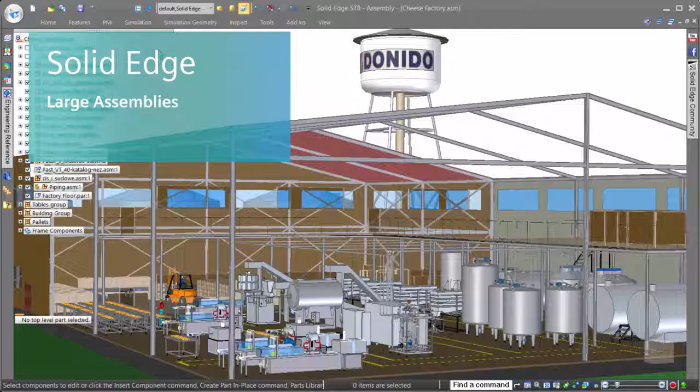In this example, we'll look at how Solid Edge handles large assemblies. One of the biggest issues when working on large assemblies is how much time it takes to open and load all of the parts. Solid Edge accommodates for this by giving the user full control of exactly how a large assembly is opened using a variety of different tools.

Tools such as Assembly Open As is one way in which users control how they optimize time to open, providing options to define the size of an assembly as well as the state of the parts when loaded. These options are fully customizable and lead to improved performance when working on assemblies of all sizes.

Additionally, Solid Edge offers another great usability tool in a top-level assembly filter that filters out all lower-level assemblies and parts, greatly reducing the amount of time necessary to find the top level, especially when being viewed alongside other parts and subassemblies. The assembly we're working in today is from a Solid Edge customer, Donido.

This cheese factory is one of their large factory layouts containing just under 13,000 parts with over 1,700 subassemblies, altogether over 700 megabytes of data. The computer we're working with today is a Microsoft Surface Pro 3 tablet device, not a CAD-specific workstation.

We've optimized Solid Edge for opening large assemblies, and notice how quickly we're able to get into our assembly and immediately begin work. No matter what system specifications or the size of the assembly that you're working with, Solid Edge provides the tools to utilize computer resources in the most efficient way.

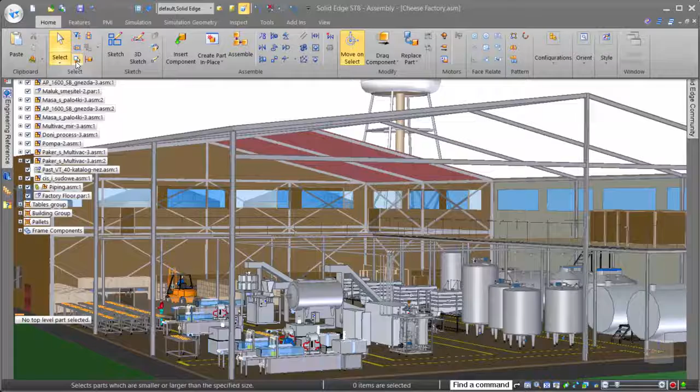Of course, once the assembly is open, another very important aspect is working performance once it's on the screen. Solid Edge offers a great selection tool that allows us to select any parts based on their size in comparison to the rest of the assembly.

The Select Parts by Size command is a great way to select small parts, such as nuts and bolts, and hide them all in one action. Once we've hidden the parts that we don't want showing, unloading them from the assembly is a simple process that frees up more system resources for the tasks at hand.

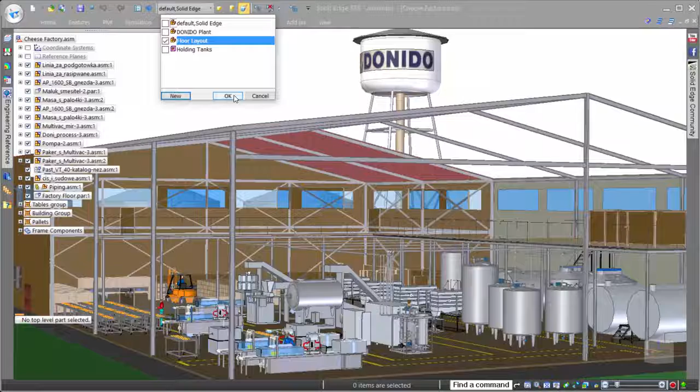Of course, in large assemblies, it's important to be able to work on the data specific to the task, and to help us focus on the shop floor machines, we'll simply use a display configuration, or a preset grouping of parts, to show only those important to us.

Notice, many of the components on our machines seem very simple with little detail. That's because these machines have been simplified to cut out unnecessary details that leads to increased performance. Opening assemblies in their simplified state can reduce the opening time of large assemblies by as much as 75%.

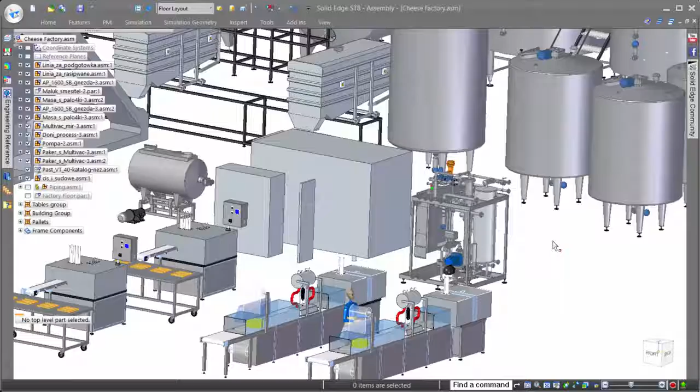Of course, as always, Solid Edge gives users full control over which assemblies they want shown simplified and which they want shown in detail. So let's take a look at how simplified assemblies are created.

Solid Edge provides users with a full set of modeling tools, so once you begin the simplification process, as many or few details as desired can be included in the resulting simplified assembly.

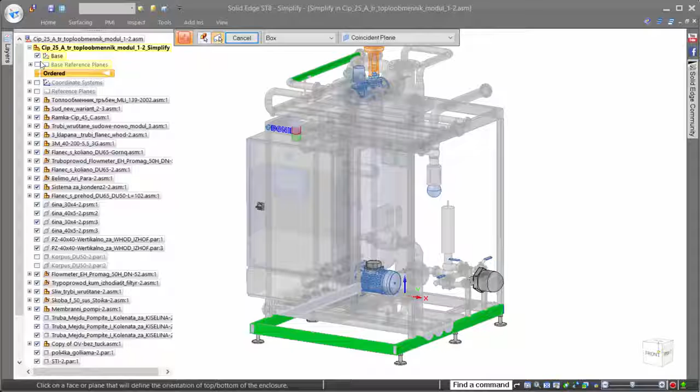One of the most efficient tools for creating a simplified assembly is the enclosure command, allowing users to simply click on the parts that make up the boundaries and define a simple shape to represent it.

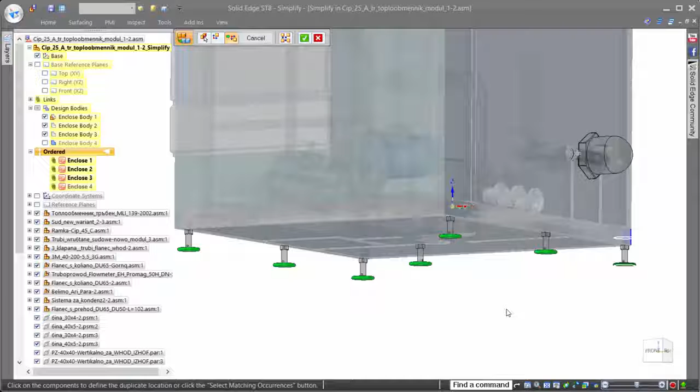If we need to preserve specific geometry of the assembly, we can easily do so. Here, we need to keep the feet for placement purposes, but rather than simplify each one individually, we'll use the duplicate component command to quickly place the simplified versions of the feet all in one action.

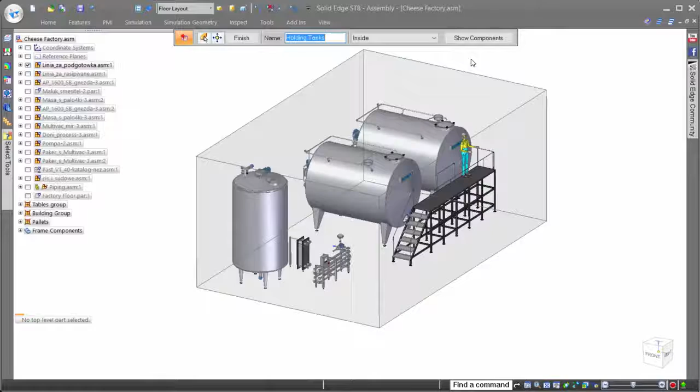In addition to the display configurations to turn on and off specific assemblies and parts, Solid Edge also provides zones, a tool that shows all components that lie within a defined area. Zones are also fully customizable, allowing for dynamic size changes to show whatever components you want within the desired working area.

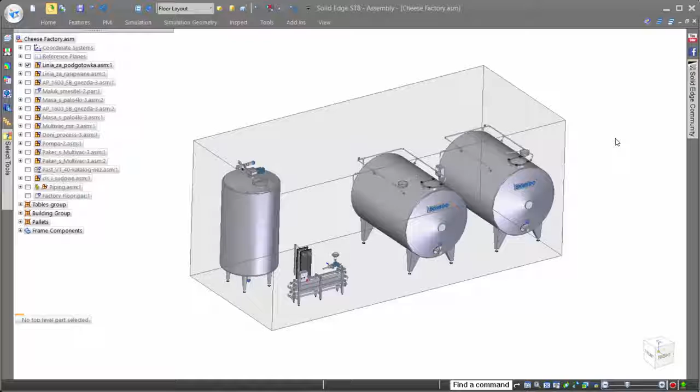In addition to working in zones once an assembly is open, the Solid Edge Open dialog allows users to select a specific zone when opening the assembly for the first time, making sure that only the components necessary for the work task are loaded. Of course, the less parts in a zone, the faster the open time.

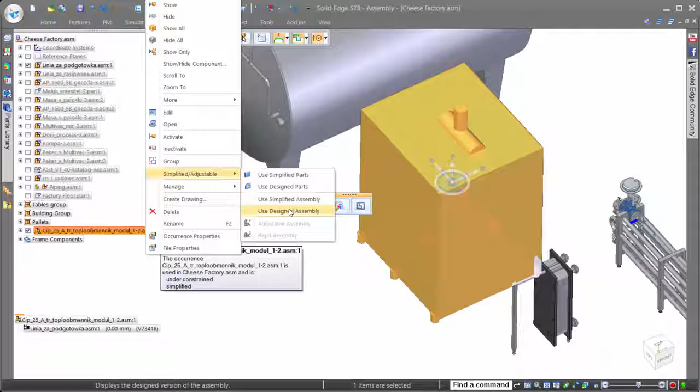Another great time saver when working in large assemblies is the intelligence that Solid Edge brings when placing new parts into an assembly. Notice when we bring in the new machine, Solid Edge automatically recognizes that there is a simplified version and uses the simplified geometry to optimize performance. Once fully placed, we can easily turn on the designed version of the assembly to see the full details.

Our next design task has us making some changes to the packaging equipment on the factory floor. Wouldn't it be great if there was a way to search and isolate all of the parts with specific properties associated to them?

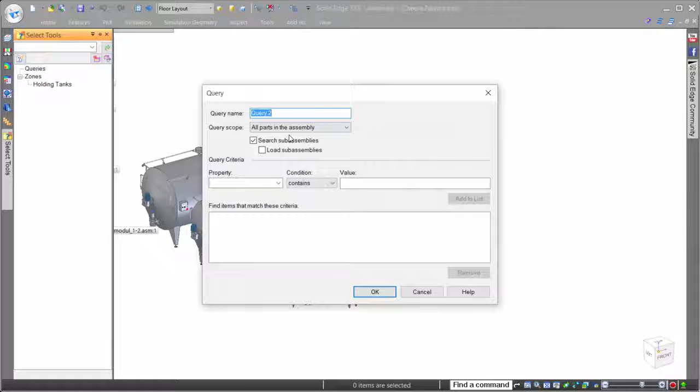Well, luckily for us, Solid Edge has a query tool that allows us to do advanced searches on any property within our assembly files. For this query, we'll simply search on packaging. Using our query quickly provides focus on the parts we need.

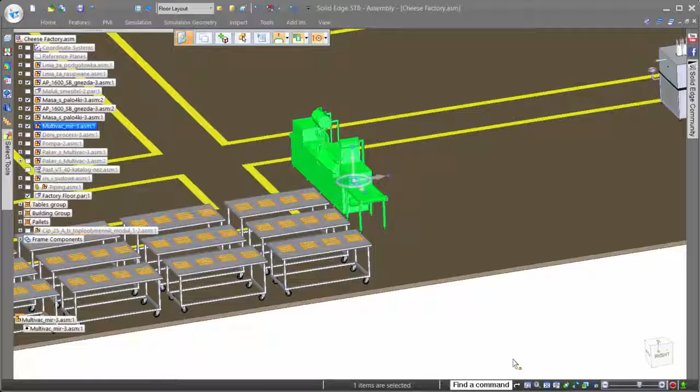For our design task, we need to increase the number of packaging machines to 4. Solid Edge offers unique capabilities in assemblies to create exact copies of existing data.

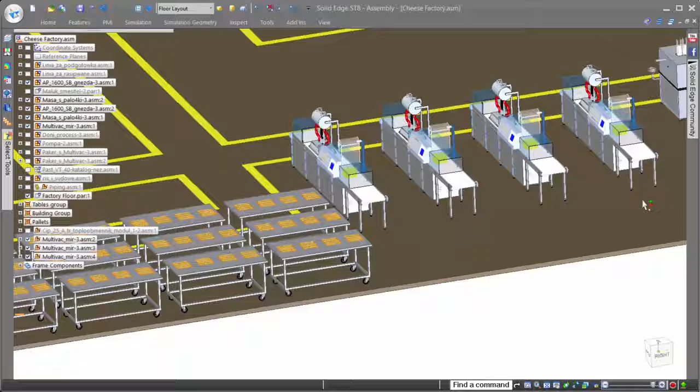Here, we can simply select the machine to copy, click copy, or hold the control key, similar to copy in Microsoft Office products, and then drag it to a new location. When making copies of components, the copies originate from the location of the steering wheel, allowing for precision on placement with keyed-in offset values, or even snapping to key points of other components.

Several additional tools also exist in Solid Edge that help to increase performance when working with colleagues in the same assembly. The first is called Limited Update.

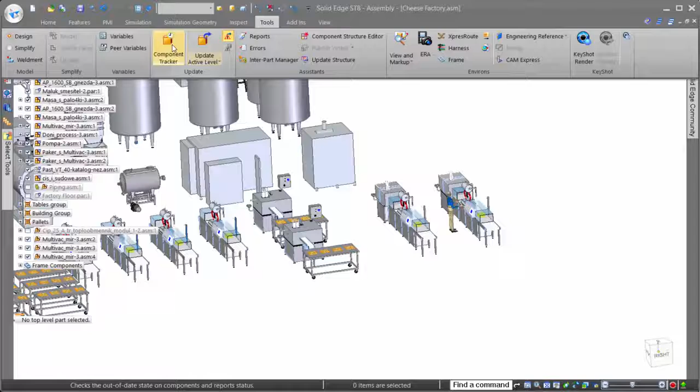Limited Update allows users to both limit which parts are loaded when opening, as well as updated when working in a specific area of an assembly. This allows system resources to be directed to the areas of the assembly pertinent to the design task.

Additionally, the Component Tracker tool is used to track the assembly and provide a full readout of the statuses of all of the parts, ensuring designers have the most current data when Limited Update is turned on.

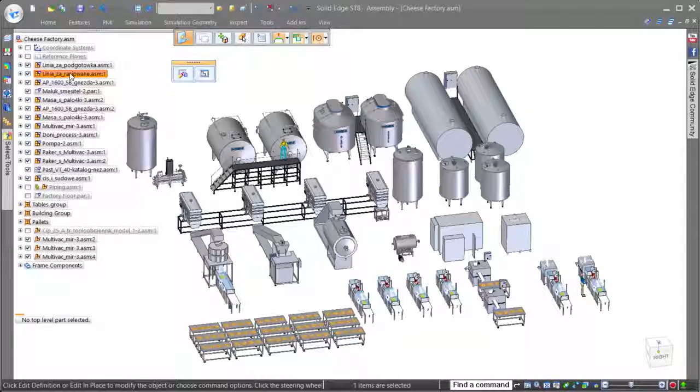And of course, once done in 3D, Solid Edge provides great tools to be able to create drawings of the assemblies, with options to bring in individual subassemblies only, or to create drawing views of parts contained only in the display configurations or zones we looked at earlier. No extra work is required to display exactly what is needed.

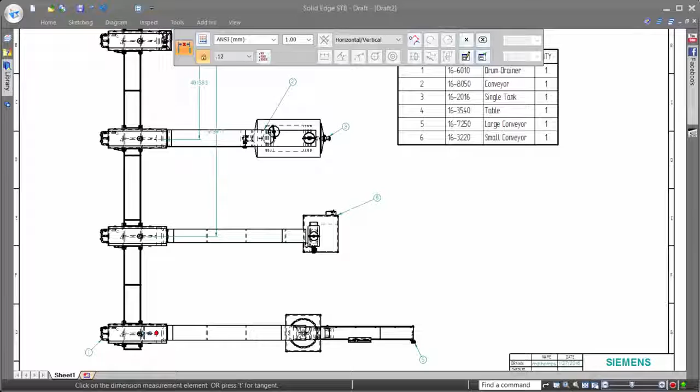Combine that with Solid Edge's ability to leverage multi-core processors when placing drawing views, and Solid Edge proves why it's the king of drawings. Solid Edge provides you with all the tools you need to work more efficiently in assemblies, whether 13,000 parts or even 2.5 million. Solid Edge, design better.